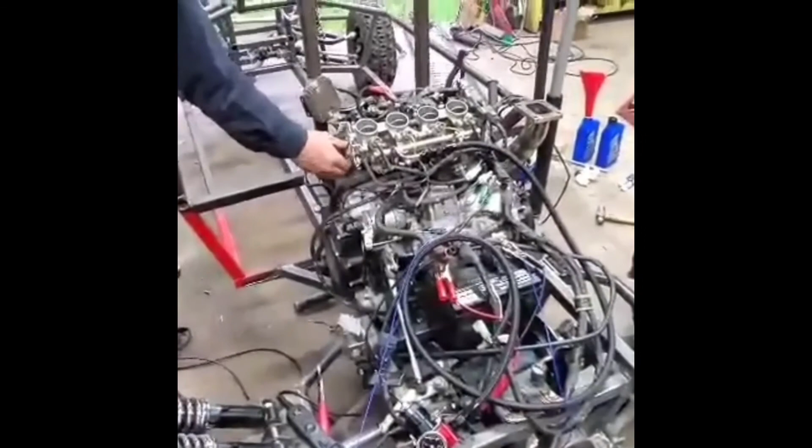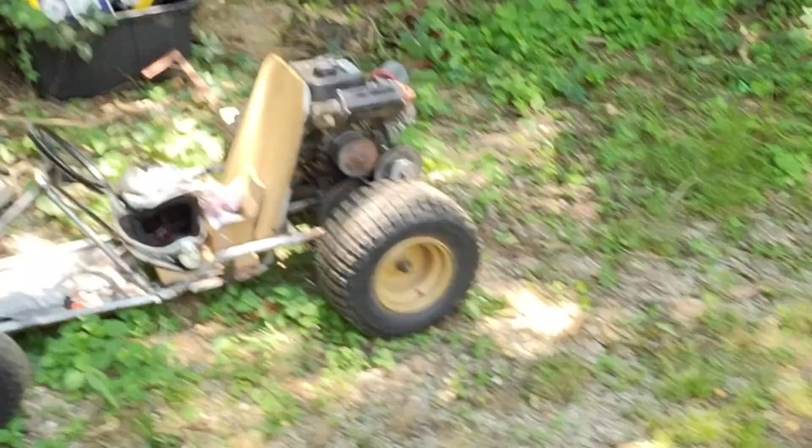Alright guys, welcome back. Last video we were playing around with Seth and our little go-kart here, did some time trials around the yard, 60-foot times in the street.

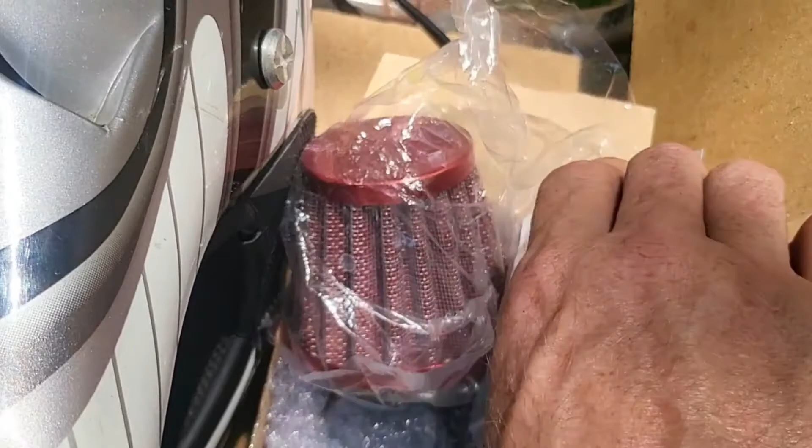Now, I do have a new carburetor, air cleaner, and intake manifold setup we will be installing on this engine, to get some more testing and play around with them a little more.

But today, the Mustang is back on the rack because I've got a new transmission cooler sitting here. This one is a 16 pass, the one in the car is 8 pass, which actually did pretty good with this car. We've done some driving with it, and it seemed to do okay keeping the transmission cool. But since I've installed the trans brake and had this car out playing around, it gets a little warm, and I want to cool it down as quickly as possible, especially going through the run. So I bought a 16 pass.

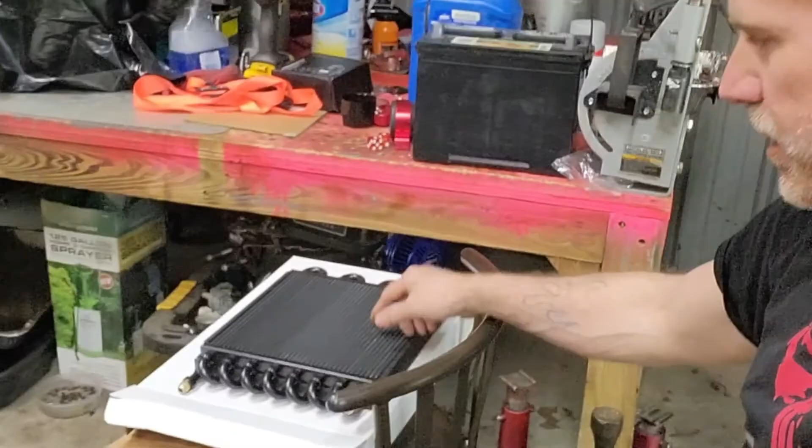It's a little shorter this way than the one in the car, but as you can see, it comes in loops all the way around, so it gets more passes through the cooling fins, which should make up for the fact it's a little narrower. It is the same height though, so I'm hoping to get it installed in the same bracket I made for the one already in the car, with the least amount of modifications, to make it easy to get in the car so we can get out and play with it.

And the cooler is not the only thing I got going in this car. I have factory style shocks in this car, so I've decided to upgrade to a set of Calvert drag shocks. These aren't too high end, they're just 9-way adjustables. I'll get them out of the box here shortly and go through everything. Suspense, right? They come with all new bushings and hardware.

More bushings. Now I'm gonna go ahead and put this transmission cooler off to the side. This is kind of difficult with one hand, but there we go. Boom, got the little dial there.

Now this adjusts rebound. I don't know if you guys remember in some of my videos where I'm using the foot brake, or I go to leave, the back of the car separates - the gap between the tire and the quarter panel grows, so the body's separating from the tire. From what I understand, that definitely takes away from forward motion. These shocks are going to help correct that to get all the power going forward, so I'll be installing those.

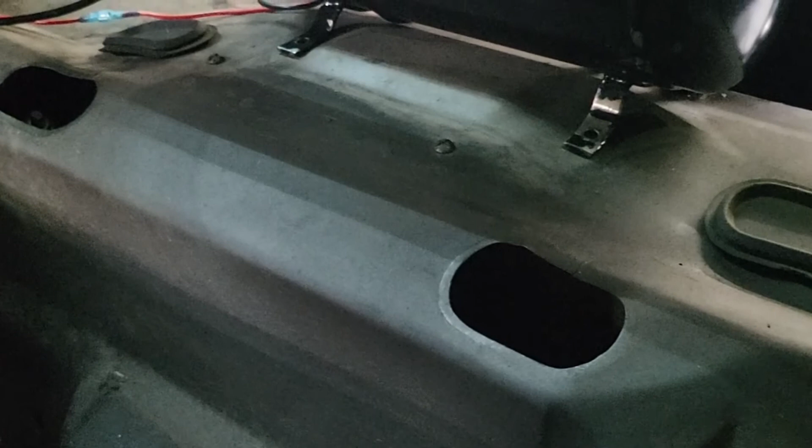So go ahead, I'll get inside the car right now because I've got to get underneath those guys there to get the top bolts out of the shocks. Then I'll get the car up in the air. We'll go ahead and get the nuts off the bottom of our leaf springs, get the shocks changed out first, and then we'll come back and start going over my new transmission cooler.

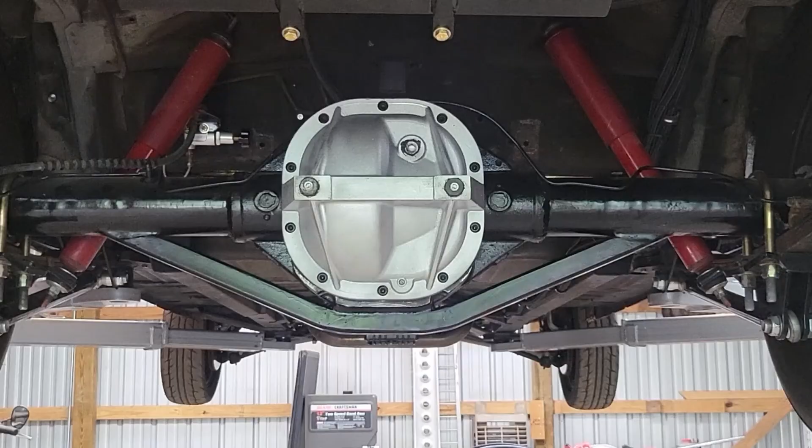Alright, shocks are out, and as you can see, I do have one sitting up in place already. It's just sitting up in there, nothing's bolted. Here's our adjuster. Now they say if you're running a trans brake with these guys, setting 1 to 5 would be the best, so I just put this one on 3. You can see up in there, and that's where we'll start off, that way we have adjustment to loosen or tighten it up. And you can see here, I just have the nut sitting up there. It's handy.

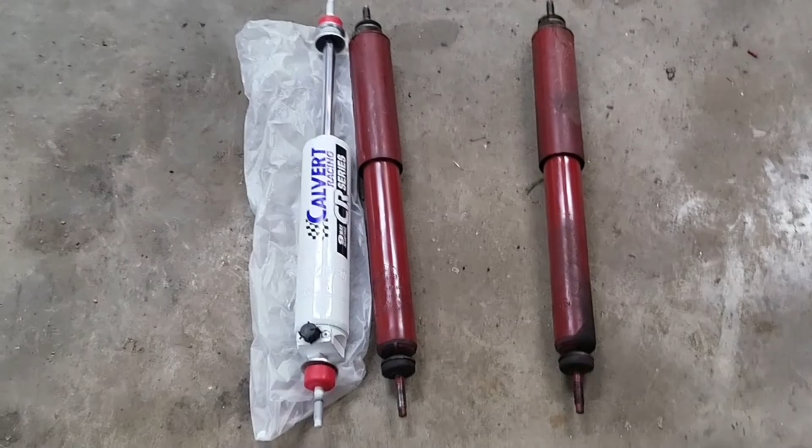Still got to put the other one in its place, but I wanted to show you a size comparison between the two. So there's our factory style shocks right there, and here's our 9-way adjustable. You can see they're pretty much the same length, maybe a slight difference, but pretty close to being the same length.

Here's another neat little thing in case you didn't know. These bushings have two little locators on them, one big, one small. The factory one is probably the smaller one, which helps keep it centered. But the aftermarket one has the larger hole, so I use the larger locator on the bushing to help keep it centered. Same with the hole in the floor.

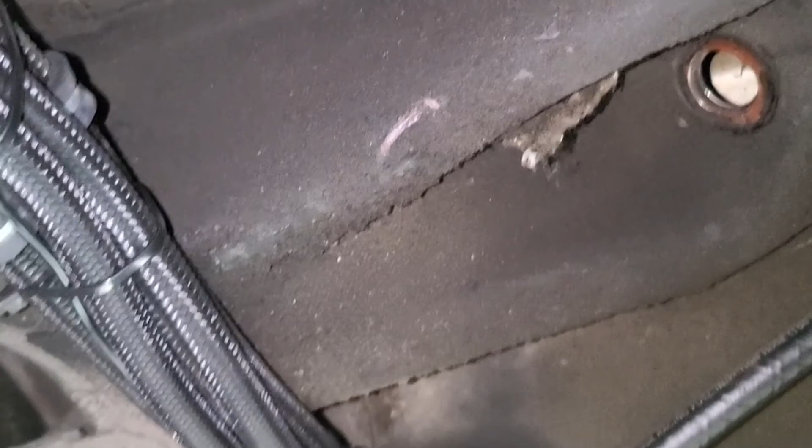Now that we got these shocks out, I'll put the other one up there and get it set into place. Then we'll start working on our transmission cooler. I'll get these lines off and get them draining into our bucket. Get all these mounting screws out and get the fan out as well. Then we'll get our new cooler set up in that bracket, see what I need to do to mount it up without too many modifications, and get the hoses re-ran. I'll get that shock set up in place, get you set up on the stand here, and we'll start moving our cooler.

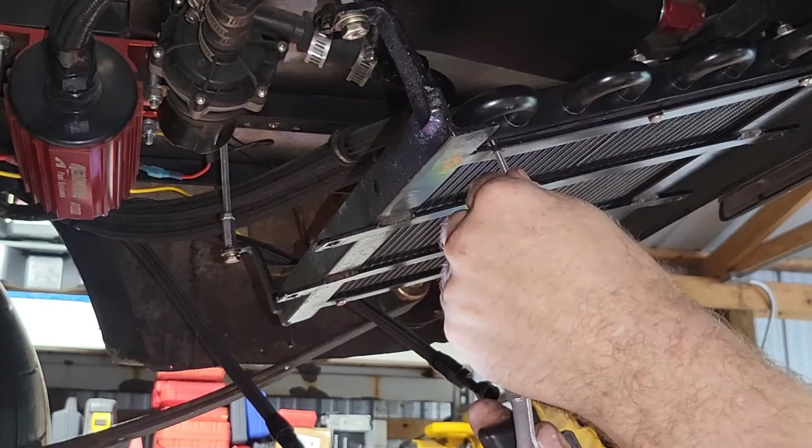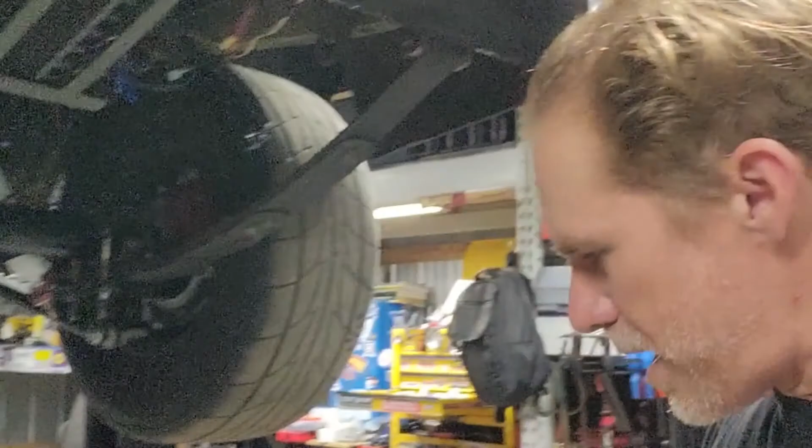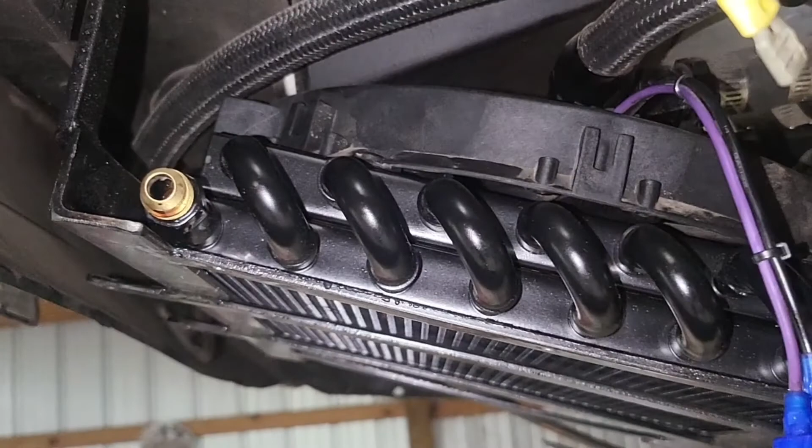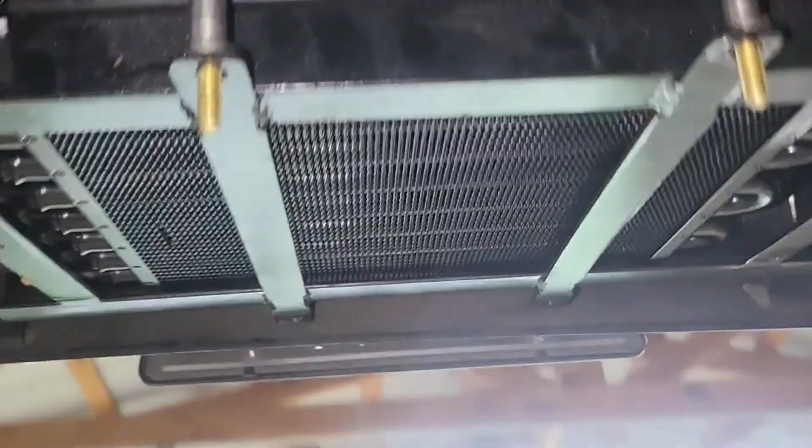Alright, got the transmission cooler out and the new one set up into place. Let me show you, it actually fits fairly decent here. So that's how it fits inside the bracket I previously made. Our hoses do fit, but I had to move it just a little off center. That's okay, the fan still sits up there and covers everything it needs to.

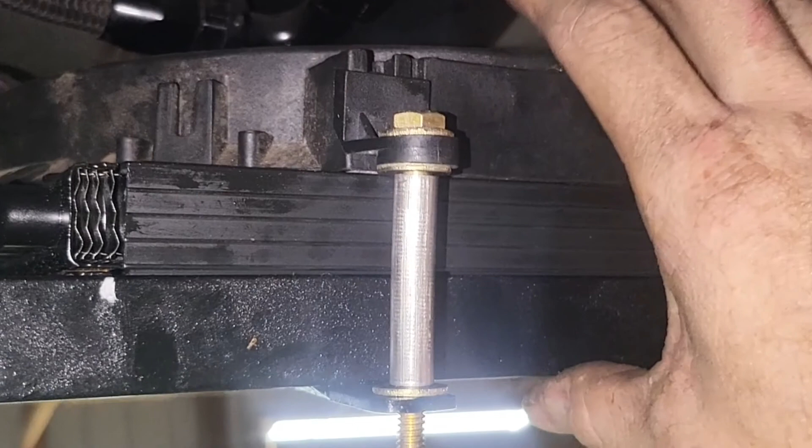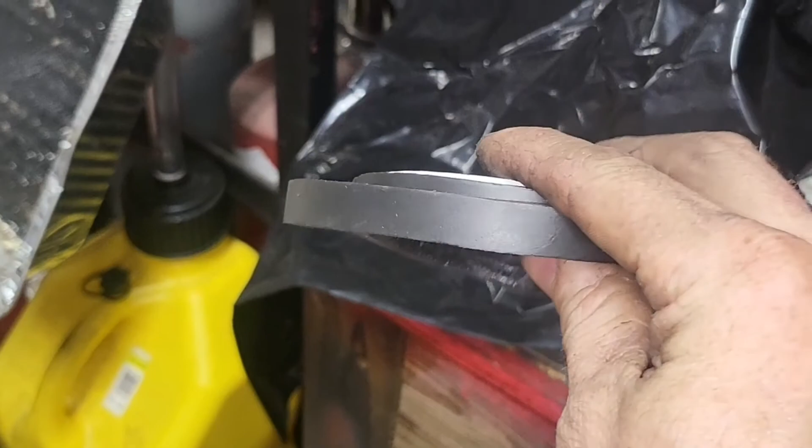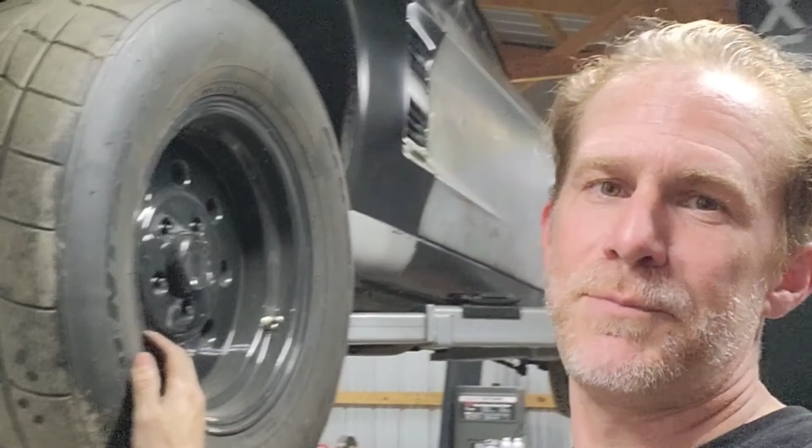I did have to make some longer spacers so we're able to use the fan to help clamp it into place and hold it down. Our cooler will be sitting on some 1/2 inch by 1/4 foam weather stripping, which I picked up at Lowe's. I think it's used on doors, seal around doors or something. I picked up the one from the house because I thought it would work out for me, but I did get it at Lowe's too. So I'll get the stripping along the bottom of our cooler, that way it has something soft to sit on and helps absorb a lot of the vibrations this car makes. We'll get everything bolted back down and plumbed in.

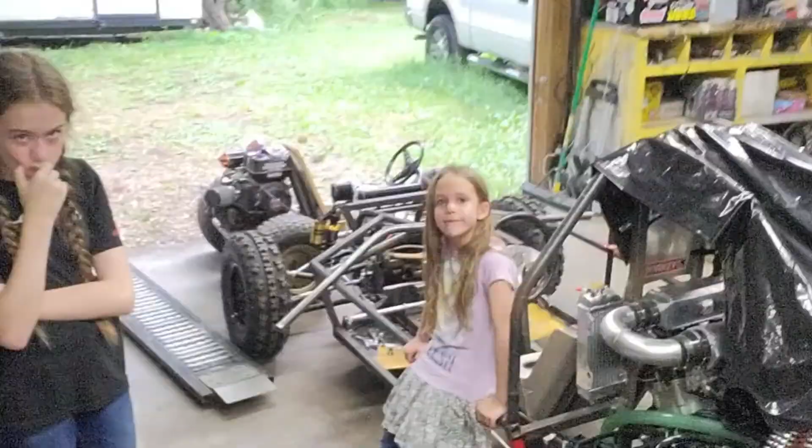Everybody's hanging out, I don't know if you can hear it, but it is raining right now, so hopefully it quits raining pretty soon. But anyway, go ahead and get this cooler all strapped in, all bolted down, get everything secured. That way the next time you see me, we'll be on the street playing around with the tune a little bit and seeing exactly how well this thing works.

Alright, me and Delilah are in the car. Seth cannot join us, he had other engagements. Poor little guy forgot to tell me, so he's a little disappointed he couldn't be with us. But we got Delilah, she's going to be watching the computer for me, holding onto it and doing some recording.

I'm not going to get into it too much right now. Still want to let the car warm up, let the transmission warm up before I start beating on anything. So we're just going to take a quick little cruise, head up to our gas station, grab some fuel, and then we'll start playing with the car. So I'll hand you over to Delilah, she can get some shots on the way up. And here we go.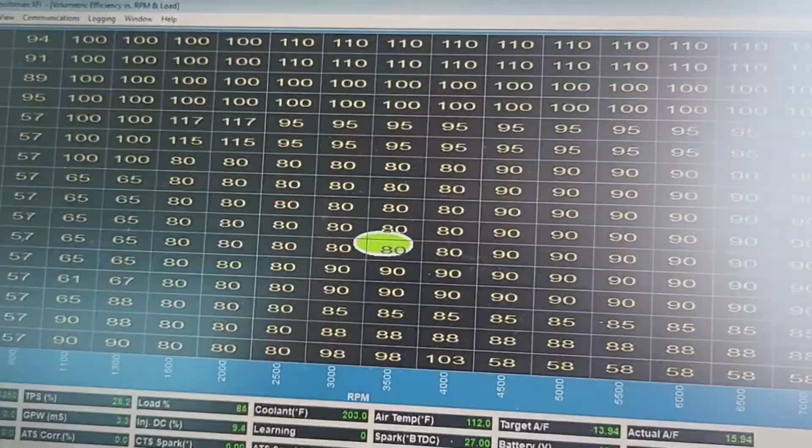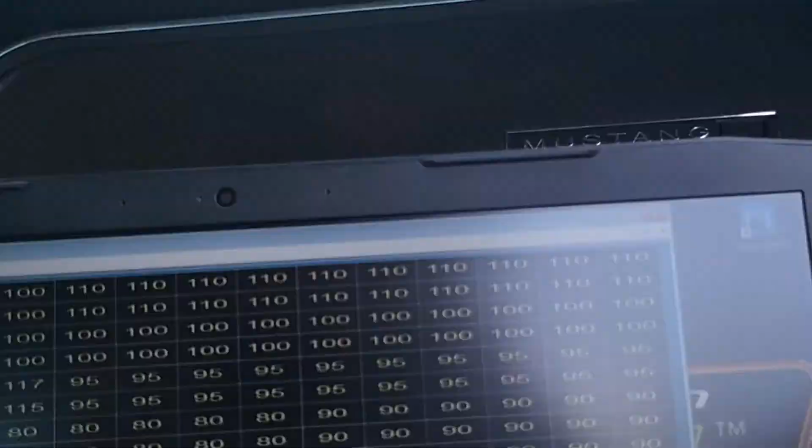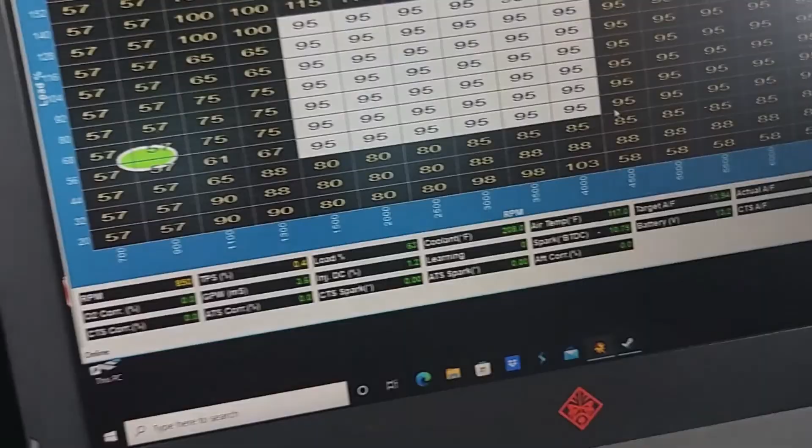Well, we're all fueled up, actually quite a few miles away from the gas station now. We took it out on the freeway, played around with it, had some fun. I have been playing around with some of the numbers on the computer here. All these, like this number used to be 65, this used to be 80. I'm just slowly ramping up my numbers to get the drivability where at least it's not at 15 while cruising. I'm trying to get it within the 13.5 area.

So far I'm getting pretty close, and it's cruising a lot better than it did after first installing these gears. We're pulled over right now, just letting the thing cool down. I'll tell you, 331s on the freeway in this car are excellent, and the takeoff with the new gears

and the way it loads the engine and turbo up is freaking awesome. I can't wait to get this thing on a track and turn the compressor on, put some boost to it, because right now I'm just on gate. And she's having fun videotaping, watching me play around.

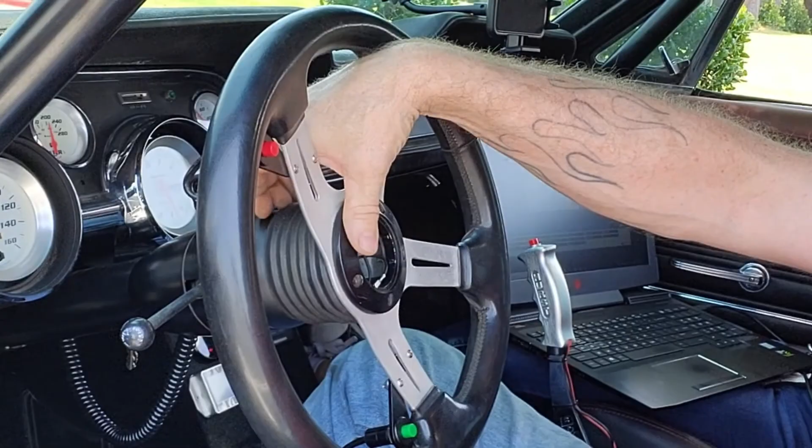Gonna sit here for a few more minutes, let the car cool down a little bit, because it is hot. I can't even see it now. Must have been some oil dripped on a header or something. It worked its way up the column. Had a neat little puff there, but it is hot. Everything's running above 200 — engine, transmission — the air temp's at 120.

So, and I have water in it. I did make sure the pump's running. So we're under the shade. We're gonna let it cool down. We'll be back here in a sec. We'll be back on the road.

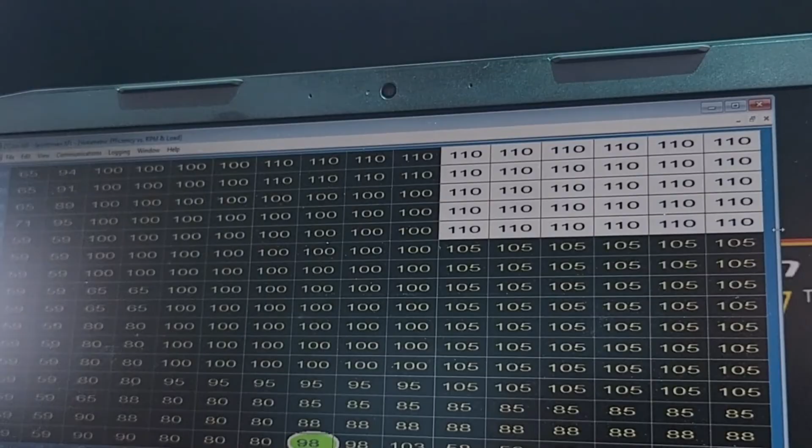We are back in the shop. I'll tell you, driving that thing with 331 gears in it, it's so cool, especially on the freeway. I think it was probably cruising around 75, 80 miles an hour at about 3,000 RPMs, which is pretty good. The car likes the gears.

I like the gears, like the way it feels, like the way it pulls. We managed to get a lot of the drivability tuned into it, so it's much better. It's not leaning out too much when I get into the throttle like before. If I really nailed it with the gear change, it would get into like the 15s, and that's way too lean. Right now I can stomp on it and it goes into the low 12s, so it pulls — that's good.

Shocks did good, actually I forgot I even changed them. They seem to feel pretty good back there. Transmission temps stayed really consistent.

It ran, on the freeway and through town, as long as I was moving, at 203, which is a tad on the warm side, but that's okay. The engine ran at 203. My intake temps were 122, which is pretty hot. It's a hot day today, so it wasn't keeping it from getting hot, but it was keeping it from getting too hot, if you know what I'm saying. So it was drivable.